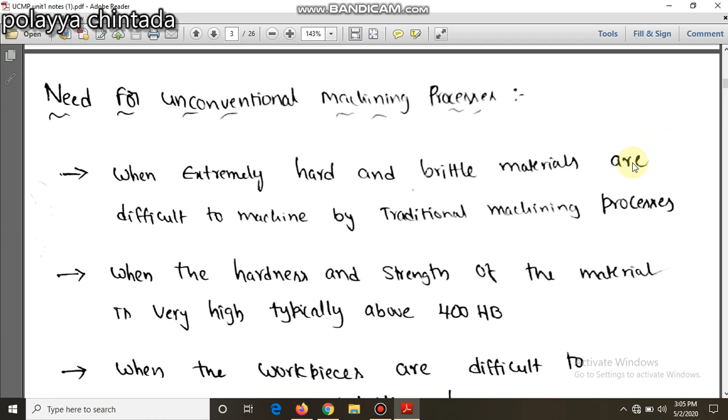And coming to the third point, when the workpieces are difficult to clamp in the work holding devices. Some workpieces have intricate shapes, so that type of workpiece is not easy to place in a simple way. So at that time, for holding purposes, they are using this type of unconventional machining process.

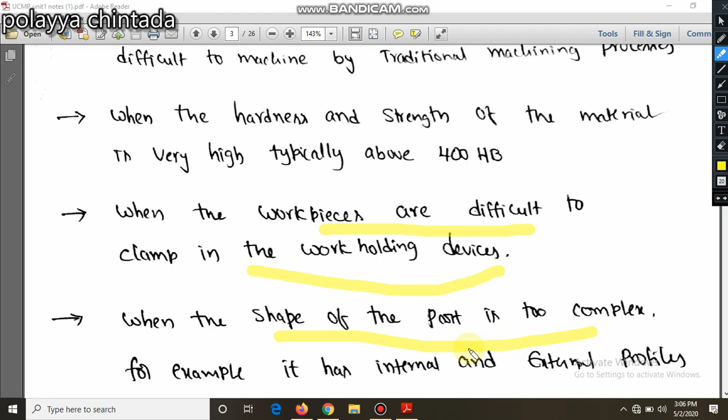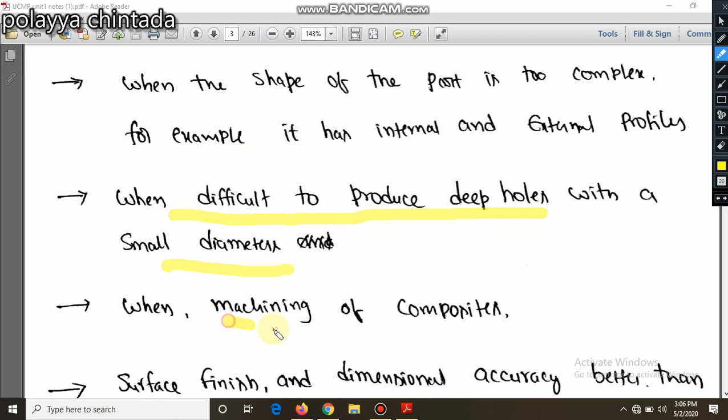As well as coming to the next point, when the shape of the part is too complex, for example, it has internal shapes and external profiles, at that time also they are using this type of unconventional machining process. Coming to the next one, when it is difficult to produce deep holes with small diameters, that time also they are using unconventional machining process. And as well as machining of composites, at that time also they are using this type of

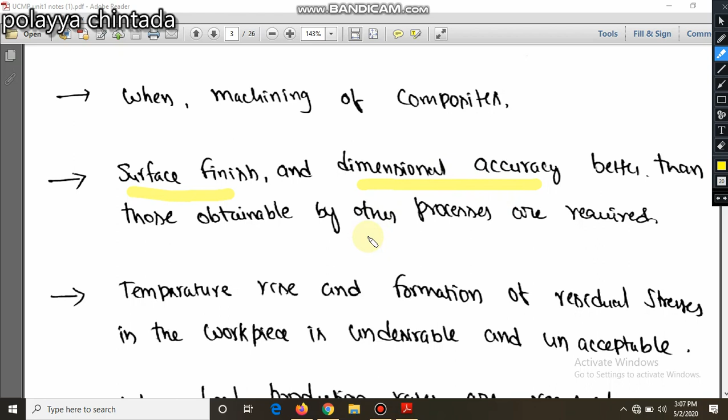unconventional machining process. As well as coming to the next point, if we want to get good surface finish as well as good dimensional accuracy better than that of the conventional machining process, we prefer this type of unconventional machining process. As well as when the temperatures of the workpiece are very high, at that time we prefer this type of unconventional machining process. When there is formation of residual stresses in the workpieces, at that time also we are using unconventional machining process.

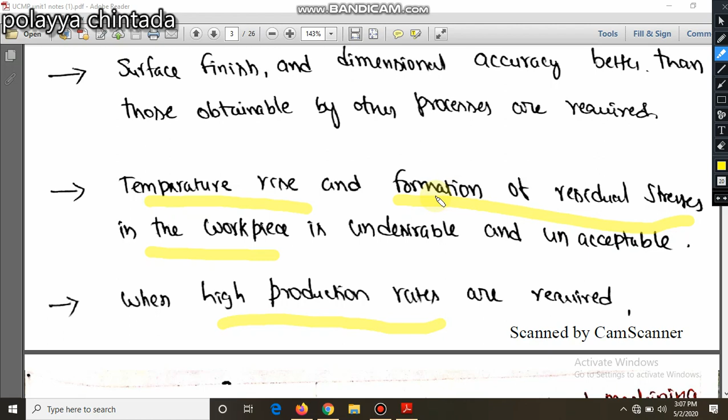Finally, if you want to produce high production rates, at that time also we are using this unconventional machining process. So these are the main points why we are studying unconventional machining process. So finally I can simplify it in a small summary. Let's see the small summary.

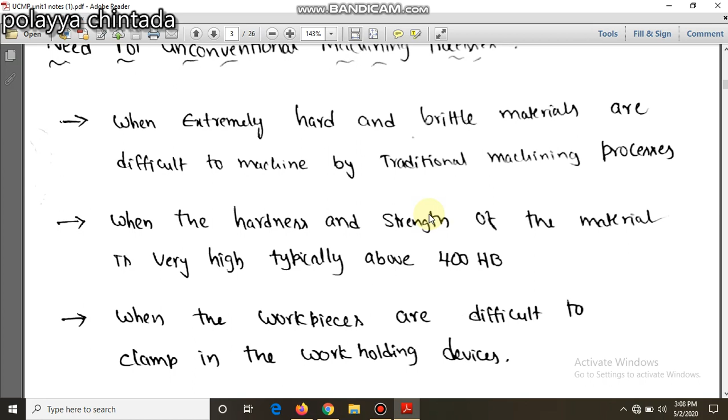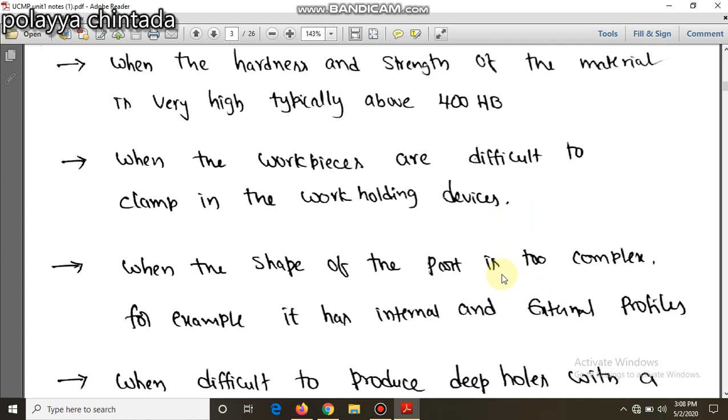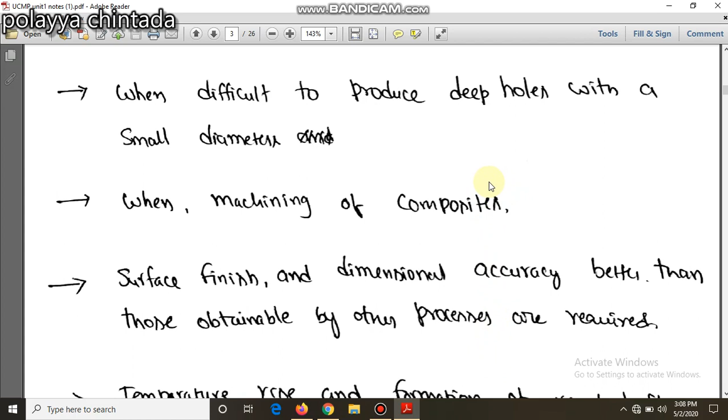So when the workpiece is very hard and brittle, the hardness is above 400 HB, at that time we are using this type of unconventional machining process. As well as when the workpieces are difficult to clamp on the work holding devices, at that time also we are using it. If the shape of the part is very complex, if you want to produce deep holes, machining of composites, and if you want to get good surface finish as well as dimensional accuracy, at that time also we are using unconventional machining process. If the temperatures in the workpiece increase, at that time also we are using it. When we want high production rates, we are using unconventional machining process.